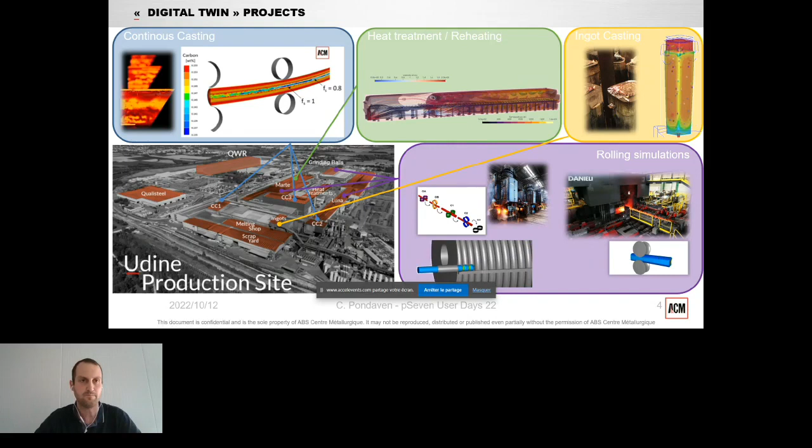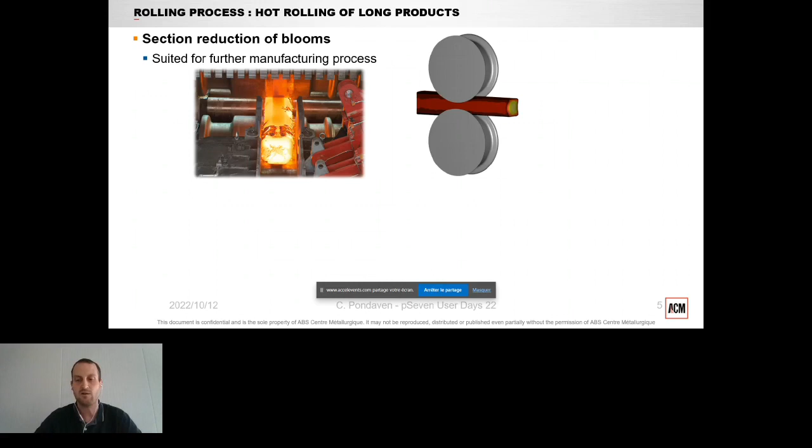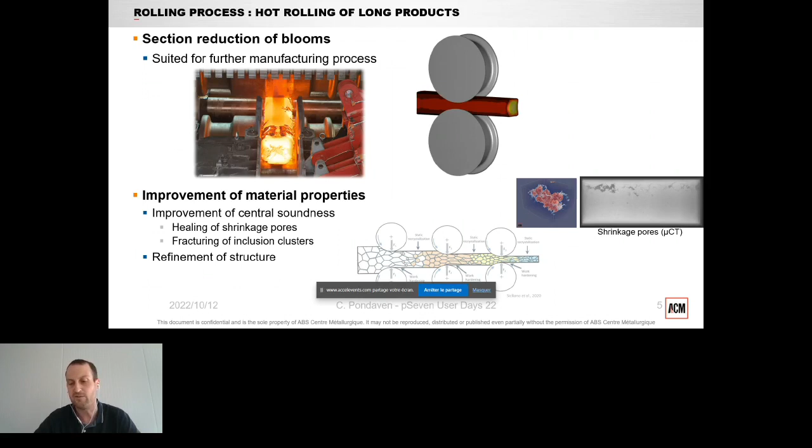So today we will be focusing on the hot rolling process, which is a forming process aiming at the reduction of the initial section of bloom to produce bars suited for further manufacturing processes, for example, for forging of crankshafts or other automotive parts. And during this process, we also experience an improvement of the material properties with the reduction of the shrinkage pores generated during casting, and also with the fracturation of the clusters of inclusions during the rolling, and we also experience the refinement of the structure of the material.

So why do we use simulation models in our industry? We use them to prepare the rolling of specific grades and avoid quality issues during this rolling, help the design of new rolling sequences by optimizing the different operating parameters to reduce the cost, to improve the cost efficiency and limit the different trials during these design phases.

How do we build our different models? So we perform a first phase of model calibration and validation by confronting them with measurements performed during the production, and we identify numerous parameters to improve our simulation. And of course, we need a lot of computational power to perform our finite element or CFD models of our processes. Today, we will focus on this calibration part of the different numerical models constructed throughout the production teams.

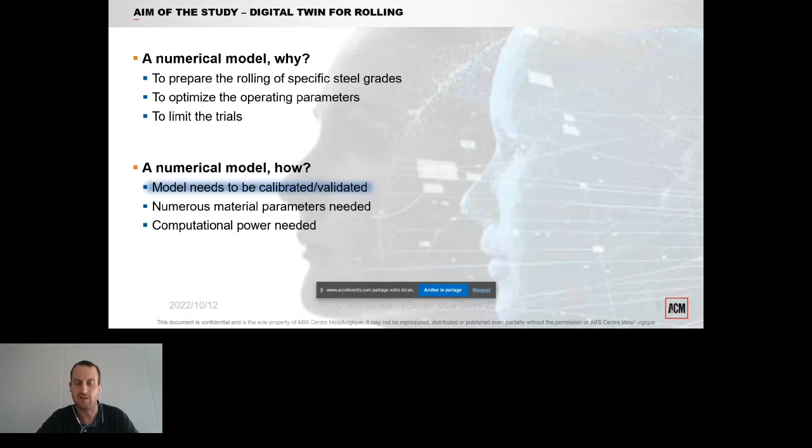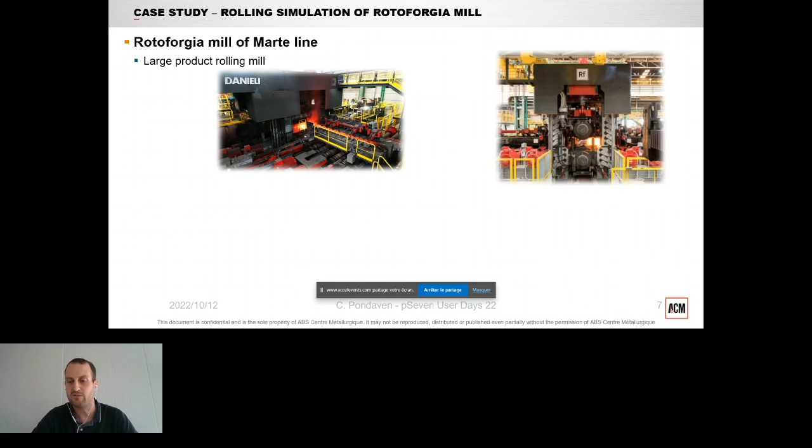So the case study of my presentation is the rolling process performed on the Rotoforgia mill of ABS. This mill is dedicated to the rolling of large products with a maximum section for round products with an initial diameter of 850 millimeters maximum at the entry of this rolling plant. And the studied rolling sequence will be rolling performed using 8 rolling stands with an alternation of loading direction to reach a final square cross-section with dimension of 440 millimeters. Here you can see the evolution of the geometry of the bar during the studied work.

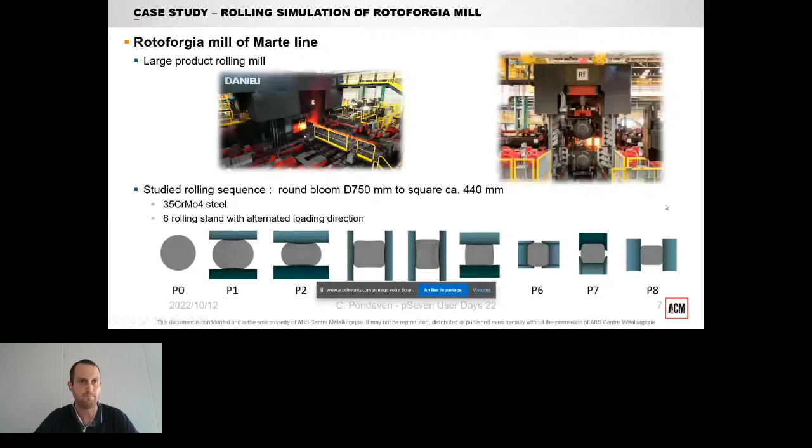So the different models and parameters used to perform a simulation are first the material behavior. So we use compression tests to calibrate a phenomenological model, which is a Hensel-Spittel model with a range of identification in terms of temperature, strain, and strain rate that are representative of our forming processes.

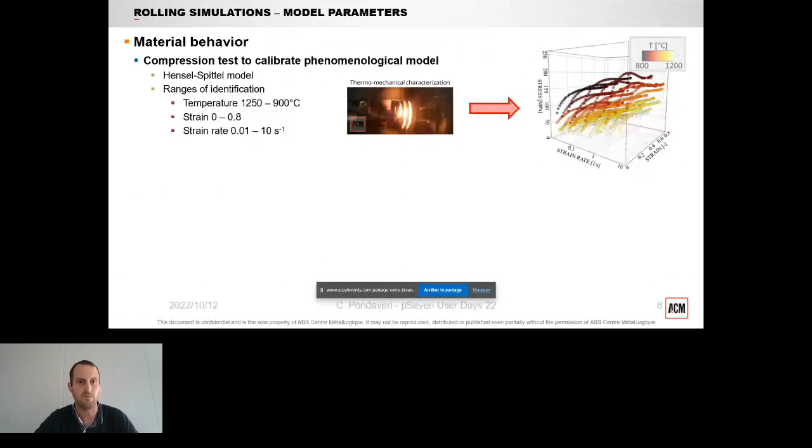We will then have to define the different boundary conditions of the model, which are the different thermal exchanges with the heat transfer coefficient of convection, conduction, the emissivity for the radiation heat loss, the external air temperature and the die temperature, and also we have to define the friction parameter. For our simulation, we use a Coulomb limited Tresca model.

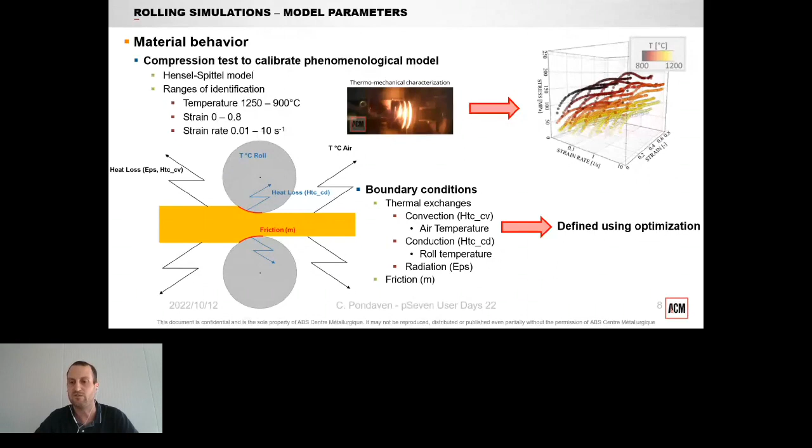So all those boundary conditions and parameters will be defined using an optimization procedure. So here we have a first set of parameters that I use to model the initial cooling performed during the descaling, where the oxides formed during the reheating phase are removed using water jets. So this part is a bit specific, so we have to use a different set of thermal parameters.

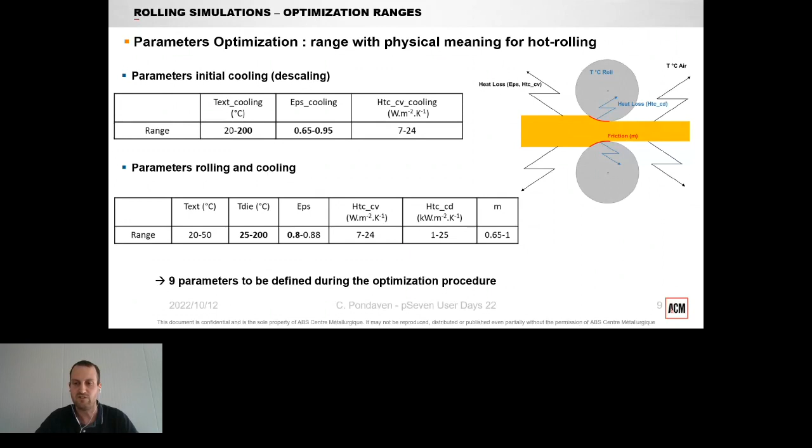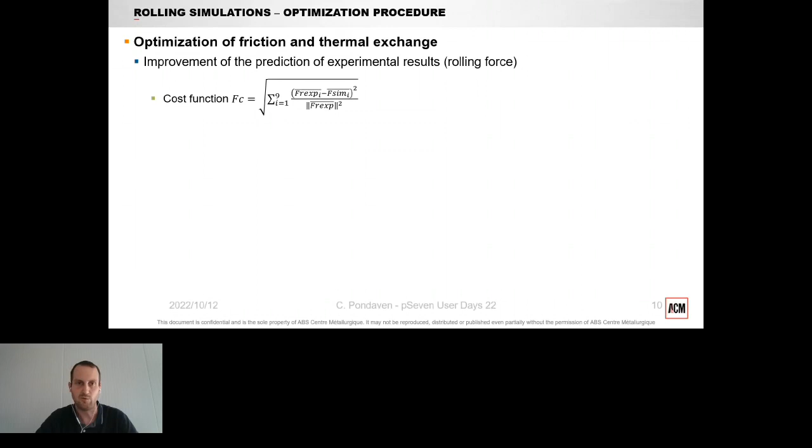And then we use thermal parameters or friction parameters that are representative of the conditions that can be observed during rolling for the rest of the optimization. So to perform our simulation, we have to define 9 parameters using the optimization procedure. The optimization procedure will consist of the improvement of the prediction of the rolling forces using the simulation model, and we compare the simulated forces with the experimental recorded forces.

To do so, we construct an optimization procedure using pSeven. We have first the design space exploration and the selection of the different parameters performed by pSeven, an automated pre-processing phase that will set these different parameters into Forge. Forge is used to perform the finite element simulation with different cooling and rolling phases and interpolation between two rolling phases. And then the results of all these phases are automatically post-treated using pSeven to compute the cost function and output it into the optimization procedure to pursue the study.

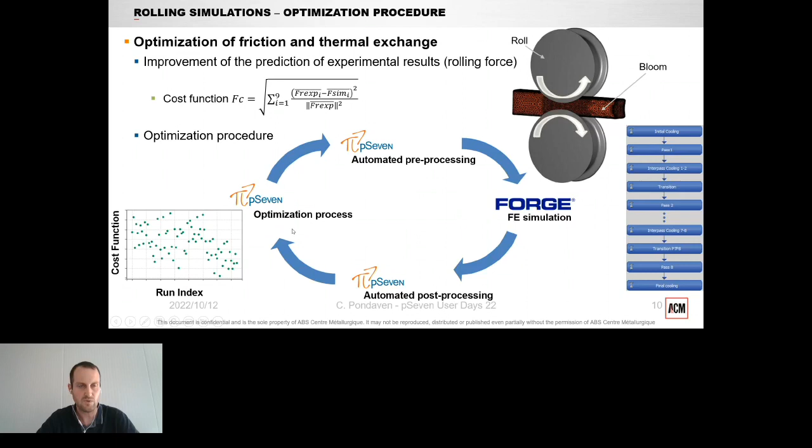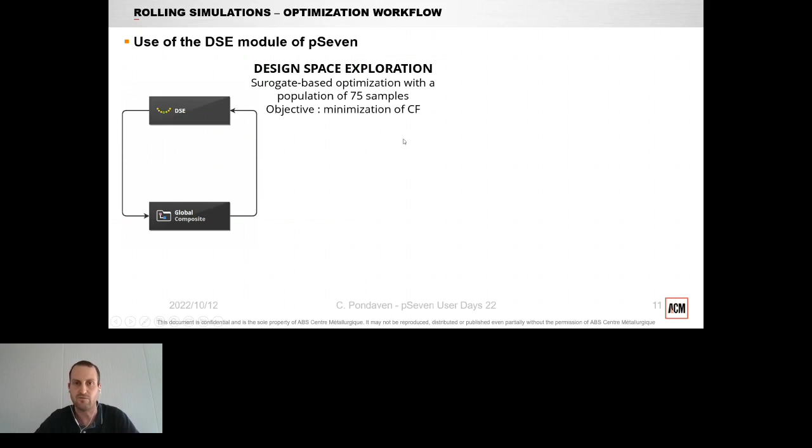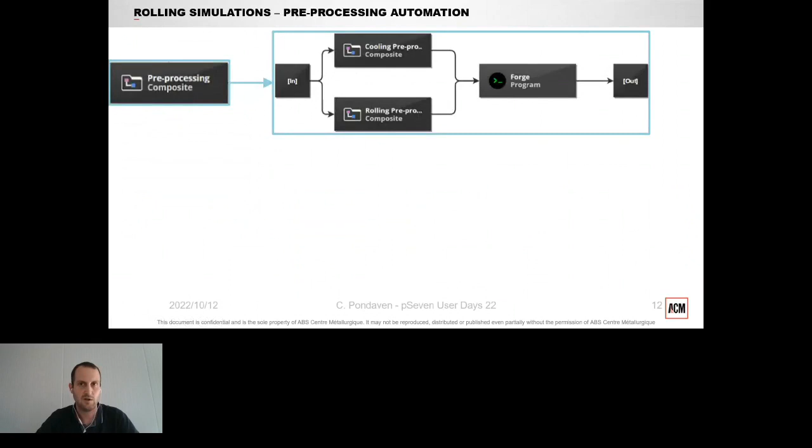So to perform our optimization, we use a workflow constructed using the design space exploration with a surrogate-based optimization technique with a population of 75 samples, and the objective is the minimization of the cost function. We then have a composite block, which is composed of a pre-processing phase and post-processing phase to compute the different results. So during the pre-processing phase, we have 2 different types of blocks.

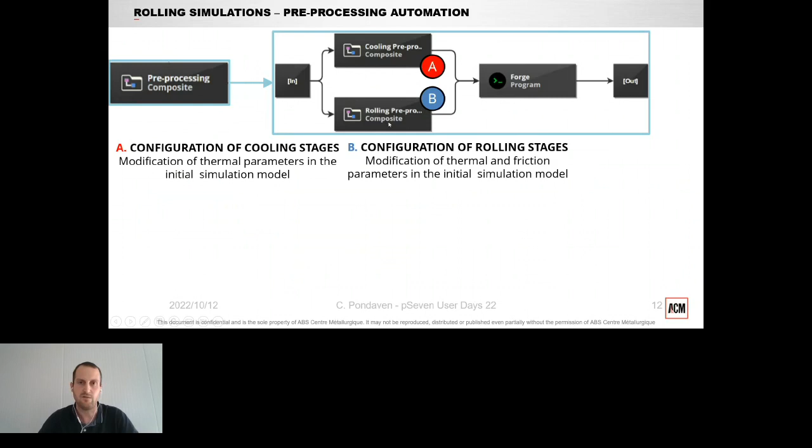One type of block where we configure the text file used in Forge to perform the calculation, the configuration file linked with cooling stages, and the configuration file used to configure the rolling steps. So during these two blocks of the workflow, we simply use the text block of pSeven with an automated field recognition in text to modify the different parameters involved in the simulation, and we use template files of the configuration to modify the entry parameters into Forge. Then the computations are automatically run by pSeven.

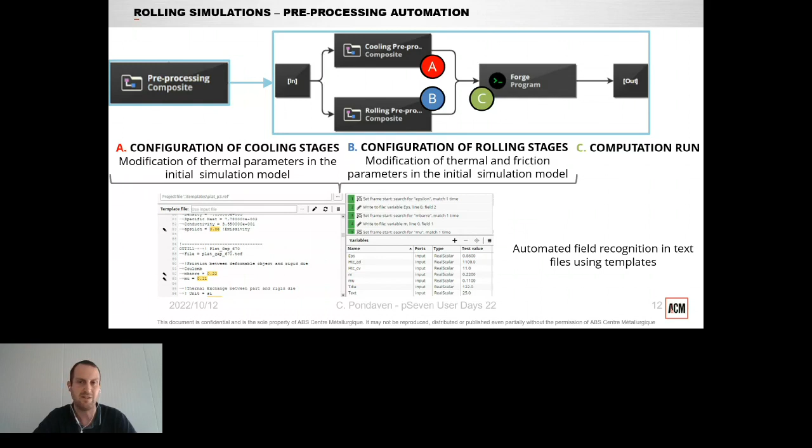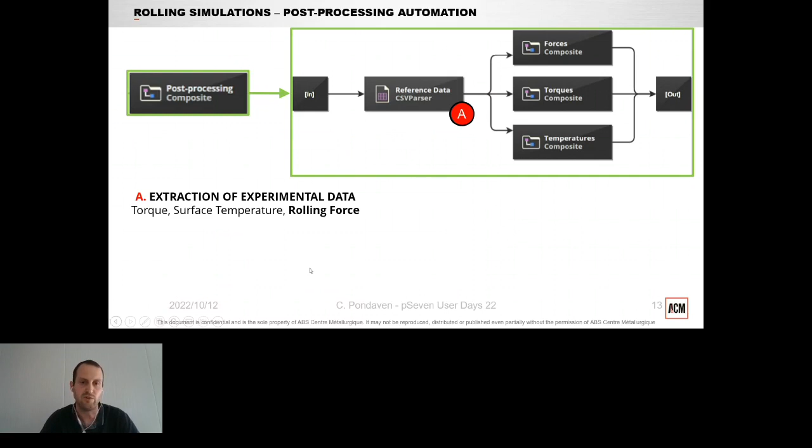Once the simulation is performed, we then have the post-processing phase, where first we extract the data of experimentation and we classify them in terms of torque, surface temperature, and rolling force used for the optimization. And then for each computed value, we use the post-processing to compute the mean of each value computed by the model. And we have a specific approach for the temperature, where we have an automation of the post-processing software of Forge, GLView, to compute the surface temperature and calculate the mean so as to monitor the temperature during the optimization phase.

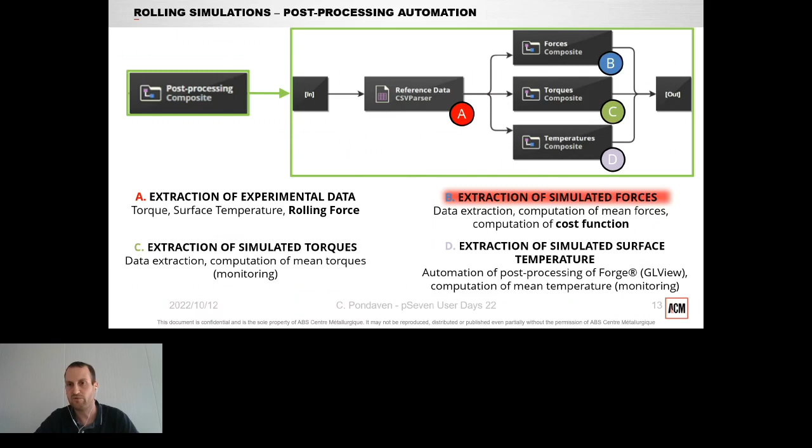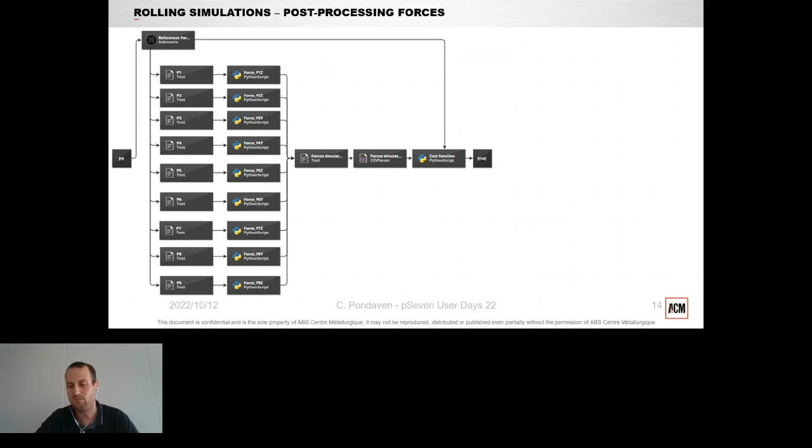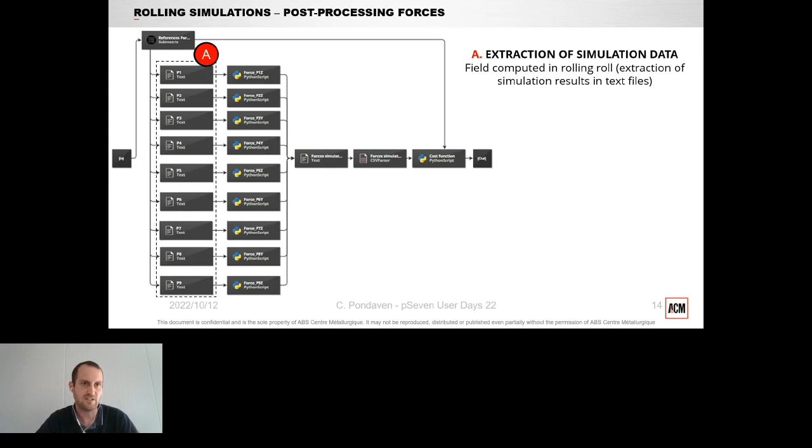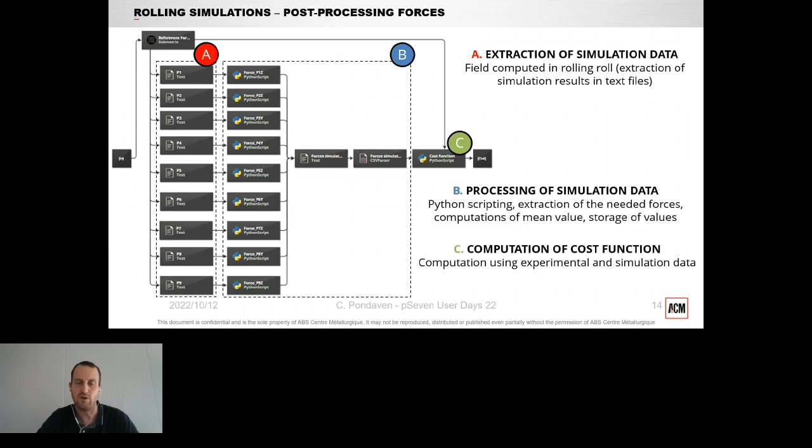So we focus here on the extraction of simulated force that will be used to compute the cost function used in the optimization procedure. So here is the example of the treatment of the force after the calculation. So we use text files to retrieve the different fields computed during rolling in Forge that are generated in a text file. We use the Python script block to process them by extracting the correct force field, computing their mean, and then we compute the cost function that will be output to the optimization block to continue the optimization process.

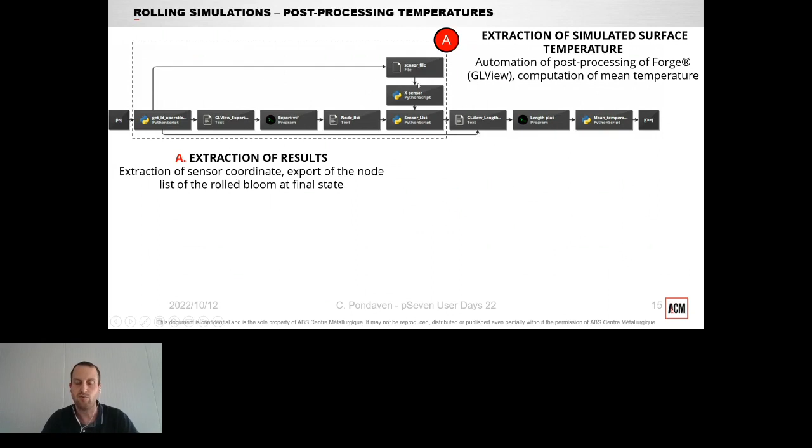Concerning the surface temperature, we have automated the execution of the software used to post-process the results of Forge. First we extract all the nodes of the part after the rolling. We extract also the coordinates of a sensor that is located in the steady state area of the bloom, where we want to compute the surface temperature, and then all this information is implemented in scripts that are executed in the post-processor of Forge to compute the temperature on the surface of the bloom, and then compute its mean and compare it to the measured mean during the rolling operations.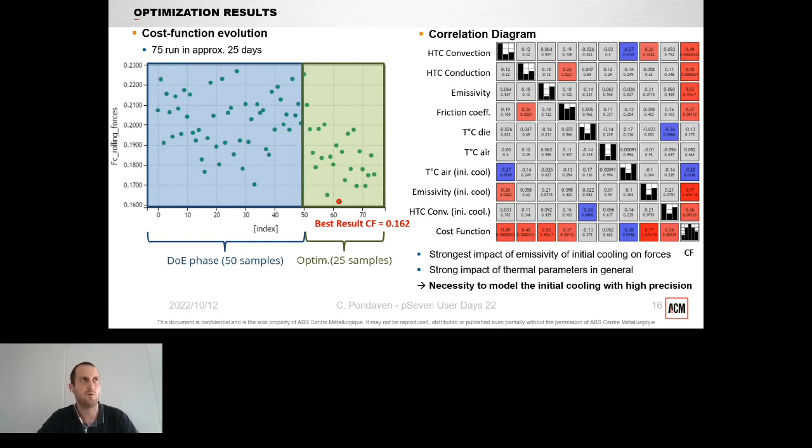Using this diagram, we can identify the strongest impact of the emissivity of the initial cooling on the simulated forces. We also see a global strong impact of the thermal parameters. So it shows us that it is necessary to model the initial cooling with high precision to improve our model, and gives us a way to improve the modeling of the rolling process that we do.

In terms of simulation results, we can see here in green the simulated forces after the optimization procedure, with an improvement obtained. Also, in terms of final temperature, during the process, the installation of the pyrometer online didn't allow correct measurement of the surface temperature of the bloom when their sections are too high or their lengths are too low.

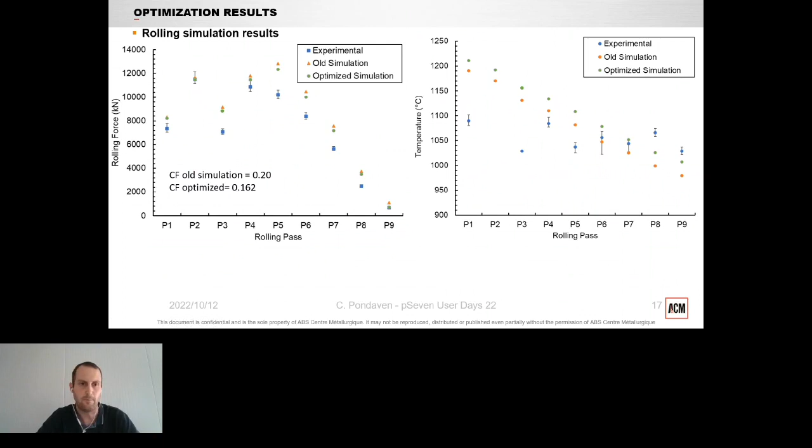But after the last pass, we can compare the temperature with our model, and we see an improvement using our optimized value. So we see a clear improvement in comparison with all the old results of simulation obtained using trial and error technique, which is time consuming to do the pre-processing and post-processing, and we also see, as I said before, the optimization of the final temperature.

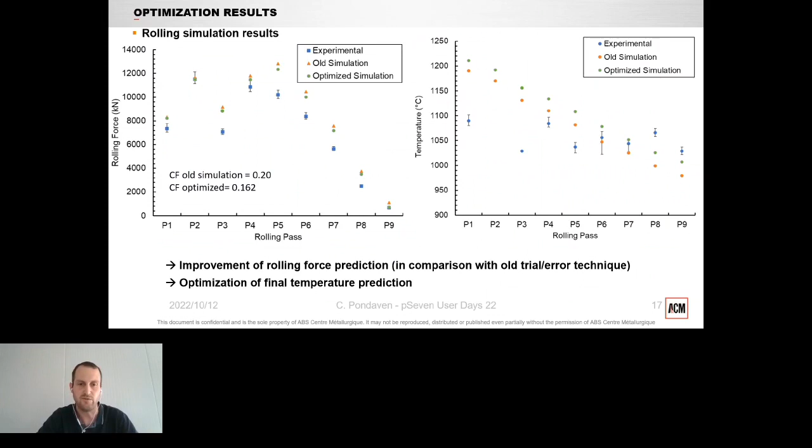So here, as a conclusion, we can see that using pSeven, we improve the modeling of our rolling process with an automated procedure of calibration, which uses a wide population of entry parameters. And also it helps us to identify the most impacting physical phenomenon or stage of the process that we will have to better analyze to improve our model.

We also built a pSeven workflow, which uses a lot of templates to modify the configuration file or to extract the result of the Forge computation. We use a lot of relative file paths in the pSeven workflow. And also we put a convention of naming our process stages in Forge to have a workflow that is suited for faster adaptation, to use it to identify also the simulation parameters of other rolling processes or other rolling simulations that we perform at ACM.

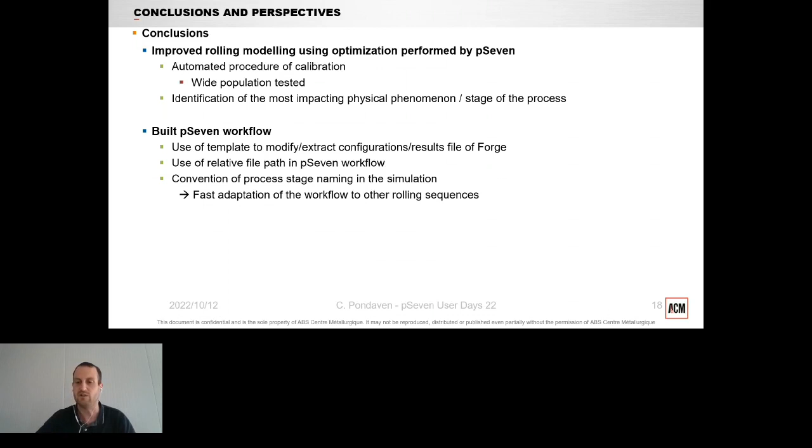In terms of perspective, after this study, we can say that we can improve our model by modifying the hypothesis used for the initial cooling to have a better initial thermal gradient in our parts to improve the result. And we can also have a better reliability of our model to perform further exploitation of our model. For example, the analysis of thermomechanical fields to evaluate damage criteria, to help the quality team of ABS, and also to analyze internal pore closure as we do at ACM.